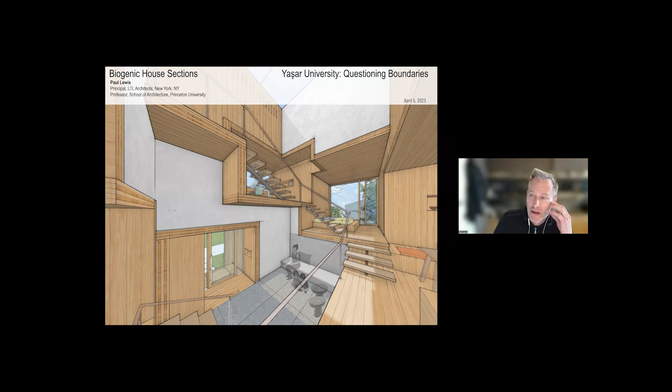Yeah, so I think that the notion of questioning boundaries is really something that we've been doing internally in the office. We've been practicing for about 25 years now. Over the last couple of years, we've had to radically rethink what we're doing and why we're doing it. And this is, I think, something that many architects are starting to face.

And in part, what we're recognizing is that a lot of the work we've done before, which we thought was motivated for all the right reasons, may have actually been heading in directions that were not entirely as effective as they could be. We've always been interested in adaptive reuse, working with existing buildings, whether it's an art museum in Texas or a former maintenance building in California that gets converted into an open collective office space, reusing as much as possible the materials that are there, or even in interior renovation projects, a new museum in New York City, where we adapted an existing space into a large-scale exhibition space for a museum for posters.

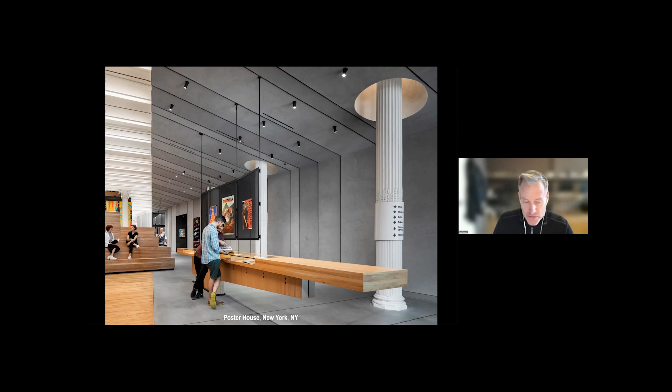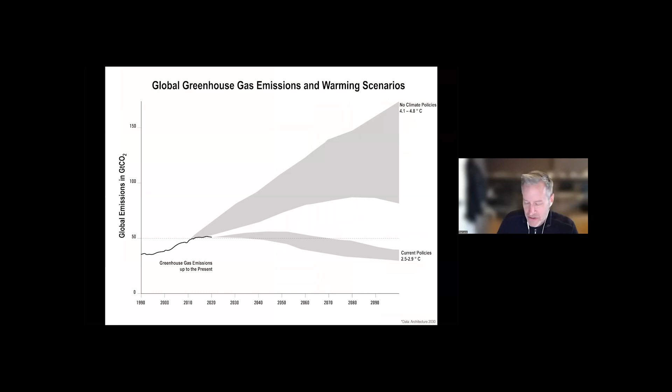But we've realized over the last couple of years that this is not exactly the whole story. So if we put this work in the context of the global picture of the climate crisis, these are all things we know, right? We're releasing way too much carbon, producing greenhouse gases, and this is having major effects on the climate. Our current policies are insufficient, and more importantly, we really need to be reducing CO2 significantly by 2030. It's only 7 years from now, to get to a point where we're net zero by 2050.

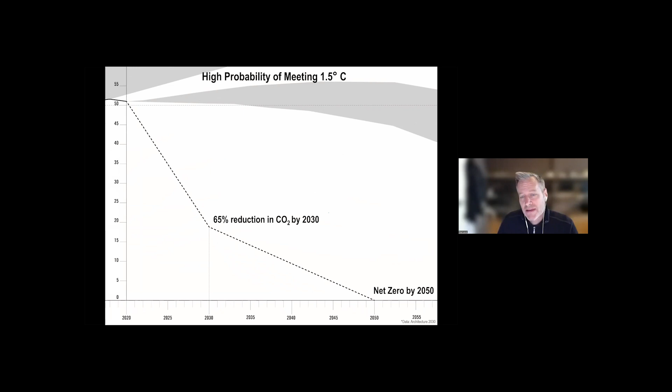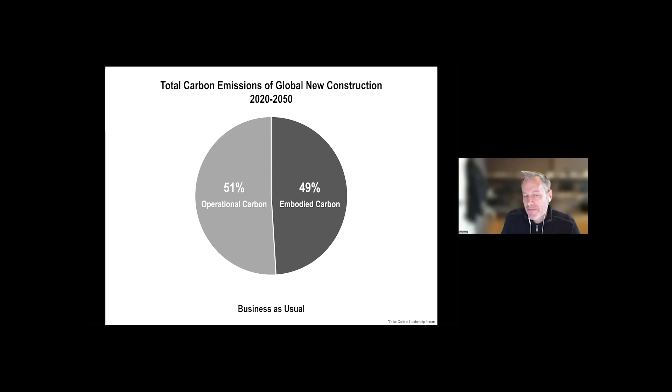The tricky thing here is that even though buildings account for a large portion of global carbon emissions, most of the energy, and I'm talking about design energy, has gone towards operational questions. How do we make buildings more energy efficient, et cetera? But that's led to an interesting condition where now, based on how we currently build buildings, about half of the carbon footprint of a building between now and 2050 will be operational carbon, and the other half is really in the upfront carbon, the energy used to make the building in the first place.

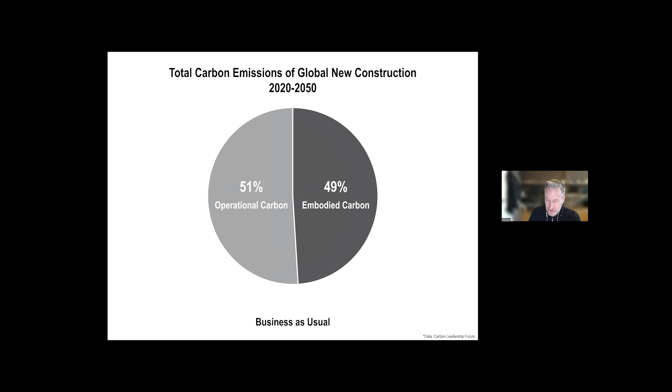And this is something that's been understudied. Again, most of the focus has gone towards energy efficiency, the performance of the building, but we've not been taking seriously the nature of the materials that go into the building at the beginning. And the problem is that that quantity of carbon is even greater the better performing our buildings get, in part because often high performing buildings require a lot of metal and steel and solar shades and various devices. So in a weird way, in getting more efficient for their operations, they've gotten less effective for their embodied carbon.

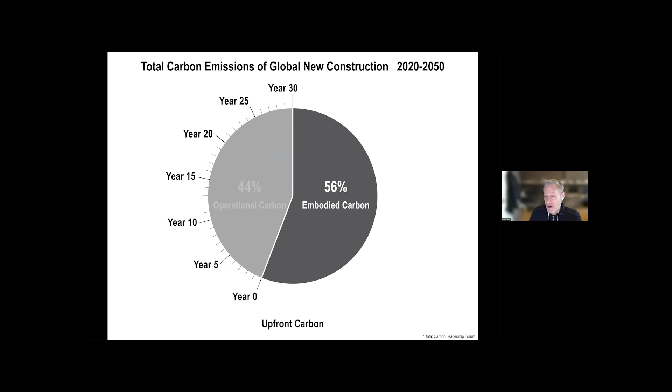And then that carbon is, as we know, spent up front, right? So you basically release that amount of carbon at the beginning of the building. And right now is when we need to be starting to make these savings, whereas the operational carbon will take years to build up to that level of equivalence. So we need to be transforming how we build, what we build from and with, and as a result, use those new materials as a way to rethink what we're going to do.

And in part, one could argue that we can just work with reuse. We should look at buildings and cities as material banks. We should just work with what we've got. And the problem with that, even though that's something that we've been highly invested in, is it's not going to attend to the fact that there's going to be this global demand for building that's going to continue, right? Something like an anticipated projection of 25 trillion square feet of new buildings, largely in the global south, for new construction.

So we can't just reuse our way forward in the future. And it raises very fundamental questions about the legacy of modernism that, frankly, most of the building industry around the world is still invested in: the use of concrete, steel, and glass.

These are carbon-intensive materials. They tend to be based on linear extraction, where you make the building and then you trash it at the end of its relatively short life. It assumes global supply chains where we're going to ship materials all around the world, and we don't tend to take into consideration the environmental degradation to where these materials are extracted, as well as the toxicity associated with these materials when they actually get embedded in our buildings.

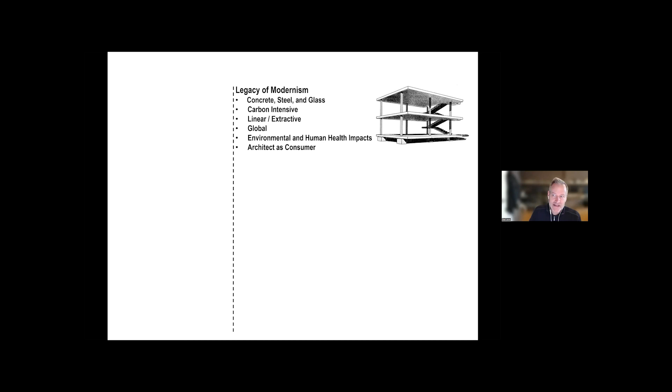And also from a standpoint of conceptual premise, it tends to put the architect as a kind of consumer, a selector of products, as opposed to really engaging the full life cycle of a material. So we would argue that this is a radical possible change to the very nature of the discipline.

Thinking through biogenic and geogenic materials, not only are they lower carbon or carbon sequestering, but they produce a different relationship between the materials and design and the kind of life cycles that need to be part of the agency or what the architect gets engaged in. In part, we know that this is because materials don't have an equal relationship to carbon.

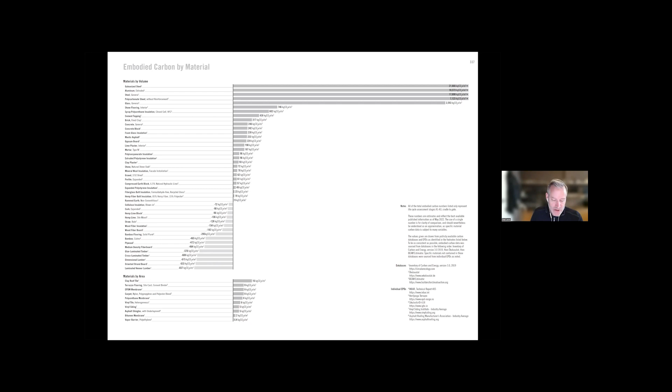Glass, steel, metals, and concrete have extremely high quantities of carbon associated with their mass, whereas other materials, plant-based materials, have the capacity to sequester and store carbon in the very building itself. So how do we move to the bottom end of the spectrum, the sequestering materials rather than the emitting materials?

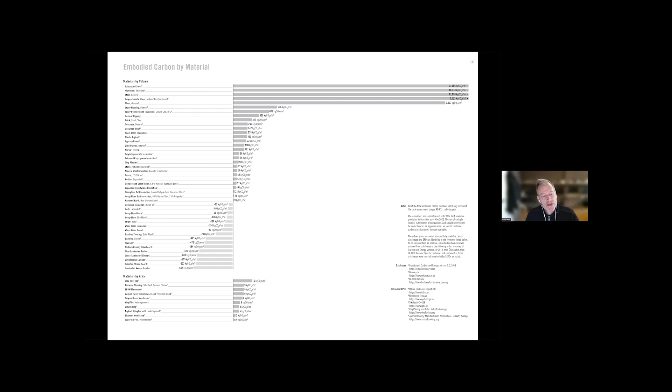So this was the basis of this book that Matthew was talking about, Manual Biogenic House Sections, which was just released a couple of months ago. And what we wanted to do with this is try to gather the best examples of buildings from around the world that have used plant-based and geo-based materials as a catalyst for their design.

Which is to say these are really inventive, creative design projects that use these materials, not just local traditions or indigenous traditions, but really looking at how design can actually be a catalyst for the seduction and the performance that can come with these materials. What was crucial for us is to make sure that we were showing buildings that are built, that exist as physical examples.

And in a strange way, as much as we acknowledge that houses are not the perfect model for building in the future, we should be building multifamily housing, we should be looking at more collective ways of inhabiting the earth. The single family house is actually more of a problem than a benefit. It works as a really good example for how architects have tested out the use of these materials in built examples, and then we could actually draw these.

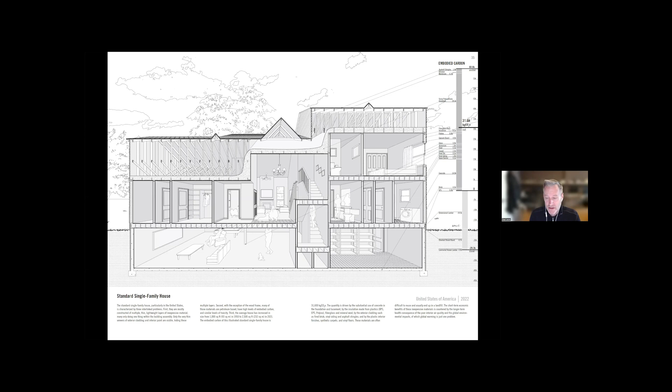So the book starts with actually a critique of the single family house. Looking particularly in the United States, this house has gotten to be extremely big since the end of World War II. The standard house in the US was about 1,000 square feet in 1950, and it's ballooned up to 2,500 square feet, in part because the materials are quite cheap.

Added to that is the fact that these materials are often made from a petrochemical basis. They tend to have toxicity associated with their entire life. But their cheapness has made them ubiquitous. They're everywhere within the building itself.

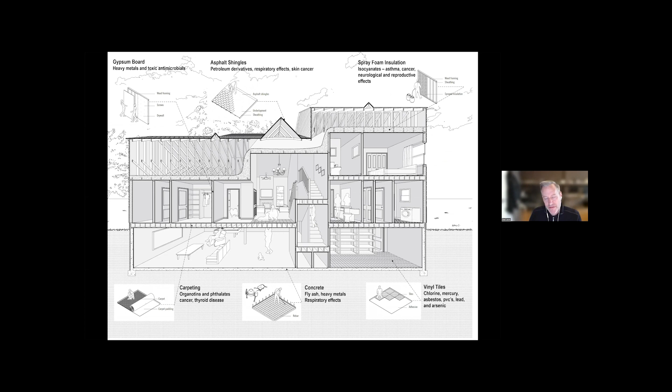So one of the things we do in the book is trace: where do these materials come from? What are their problems? How are they installed? Where do they end up at the end of their life? And almost all of them end up, not surprisingly, in the landfill.

The other thing that we looked at and critique is the assumption that buildings are largely built out of multiple materials, right? So if we look at the standard wall section of a conventional house, it's actually an assembly of multiple materials. These lightweight, thin, what we call single performing, they only do one thing often. They're the weather barrier, or the structure, or they're the insulation, or they're the paint.

They do just one kind of purpose, often because they can be marketed for that purpose and legally justified for that purpose. These tend to be hygienic layers. There's an attempt to make everything about the building be as clean-based as possible. And not surprisingly, they produce a strict binary between the interior and exterior. You don't get gradients. You get this kind of, this is on the inside and it can be conditioned and controlled, and this is on the outside.

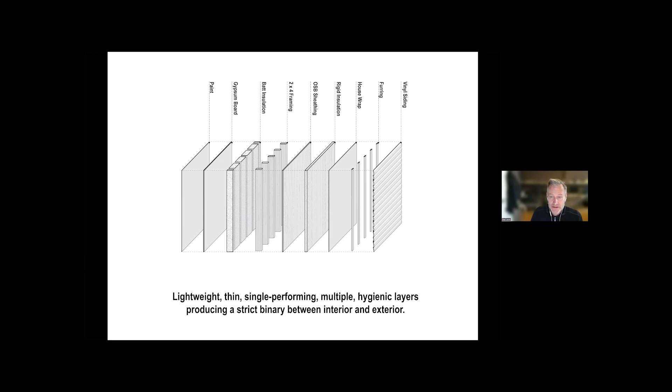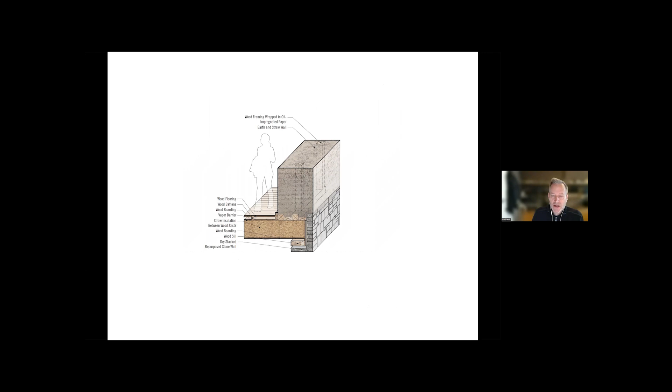And really, so much of what architects end up focusing on, unfortunately, is just that final thin veneer, the siding on the outside or the paint on the inside. And the space in between, particularly the insulation, is often left under considered. So we wanted to shift that focus in the book by looking at buildings that were thick, that were mono materials, that did multiple things, that in some cases looked at how one material could be used to produce every performance characteristic within the project, from structure to insulation to weatherproofing to waterproofing to siding to interior finish to even acoustic and in some cases olfactory benefits.

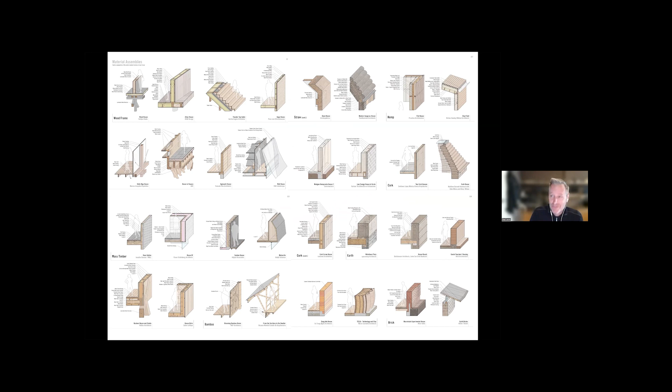And so we felt it was important to actually use our skills as architects to draw these, to make these legible. So the 55 houses in the book were all presented in 9 different chapters based on the dominant material they use, plus a chapter on reuse, which we still think is super important. And each chapter introduces the material, introduces the range of carbon associated with that material based on published carbon databases that we footnote. We then map through the translation between the field and the form.

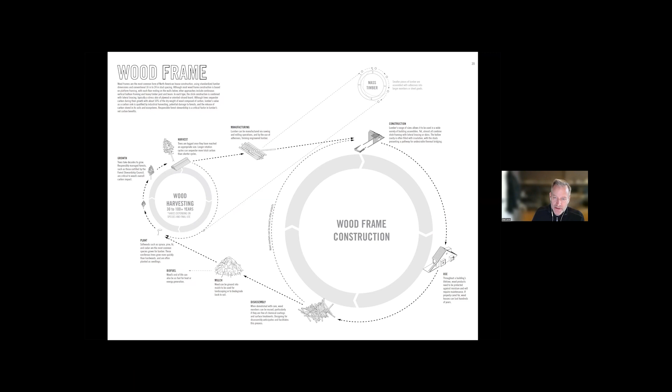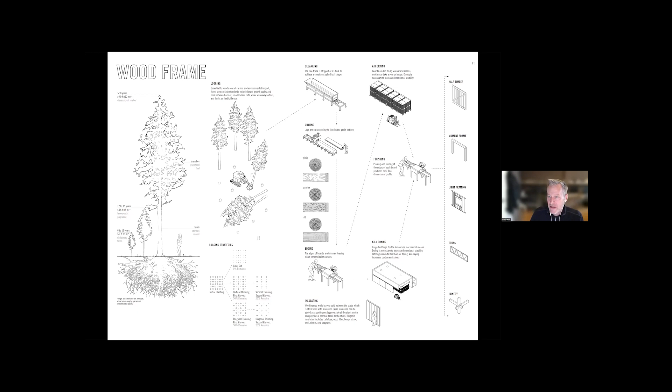So how do you go from a plant or an earth-based material to construction? What happens at the end of the life? How could we start to produce more kind of circular economies within this system? And then also looked at simply what are the logistics about the translation of plant to product? Like, what are the ways in which commonly these materials are formed, and what are the steps along the process? Arguing that the goal here is not to present these as exhaustive or thorough, but really to give a sense of what the dominant models are, so that architects could start to think about what other ways we could translate these plants into building form.

Each of the houses were presented through photographs. I should say very few of these houses are well known. Unlike Manual of Section, a previous book we had published that was all about largely canonical, really well-known buildings, we wanted to make those visible. These are less known houses, and so we wanted to show them with photographs, exterior and interior, construction photographs to show how they were put together, as well as exploded axonometrics to show how the project came together.

But the most important drawing was the single cross-section perspective that would show at a fairly high level of detail the material assembly, how it was put together, what the spatial consequences, and then what the spatial or environmental context this house existed in. So in parallel to the manual, and I'll show you examples of the different materials and the houses that we drew relative to that.

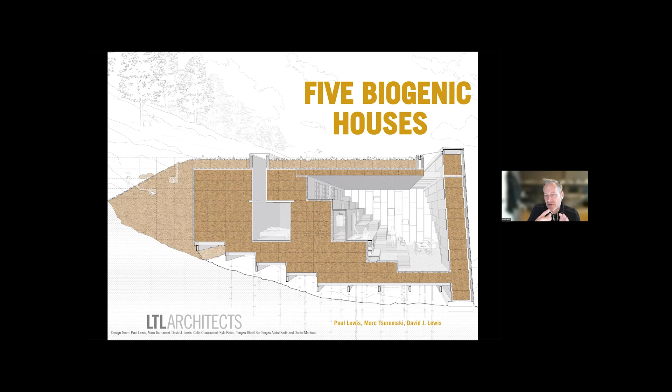Last summer, we spent a fair amount of time designing 5 houses that we wanted to look at relative to specific materials, but to really push those materials towards architectural or spatial ends that would take seriously the idiosyncrasies, the unique qualities of each of these materials. In other words, to not simply see plant-based and earth-based materials as a replacement for modern logics and material, to not just simply say, okay, I used to have plastic insulation, now I'm going to use hemp insulation. But what would happen if we actually looked at the spatial consequences that could come out of these materials? Could we end up with very different assemblies, different approaches to the very nature of the house itself?

So I'll weave these 2 things together for the rest of the talk: the manual of biogenic house sections, and then also the 5 speculative houses that we designed based on these assemblies and the overlaps between these different materials.

So mass timber is kind of the poster child for plant-based building material. It's now quite well established. And on the one hand, it's a fantastic replacement for concrete and steel, structural capacities, carbon storing, et cetera. But there are some problems with it, not the least of which is that it takes a long time for trees to grow. Harvesting trees, in a sense, takes that carbon sequestering component out of the forest. It actually releases as much carbon as it might sequester. And then we have the added problem that the lumber industry often uses only about 50% of a tree. So 50% of the harvested tree is going to go back to the atmosphere anyway. So at most, it might be a net zero gain.

So it's not the single solution that many people argue it to be. Yes, wood is fantastic. It's much better than concrete and steel, but it's not the only solution. And so we have to look beyond simply mass timber as the sole solution.

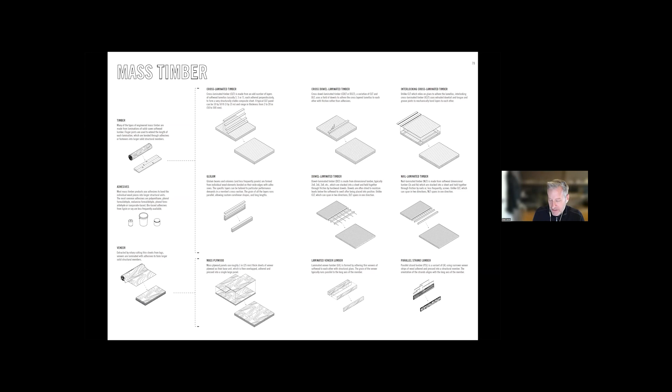The other problem with mass timber is that typically it's just a replacement for the post and beam logic of steel or the kind of slab logic of concrete, precast concrete. And in some ways, we would encourage different modes of thinking that take seriously the sheet slab quality of the CLT.

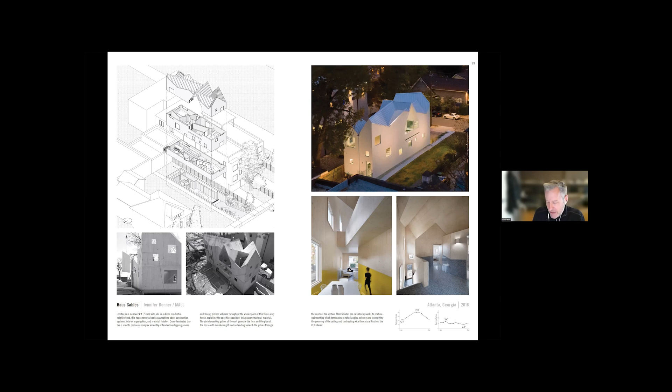Jennifer Bonner has done excellent work on this, both with her book Blank, that argues for the role of the sheet good as a source of invention, and her own work, Haus Gables, is a great example of a kind of house that uses the CLT to produce very different forms that echo the gabled form of the timber two-by construction, but produce spatial nesting that is fundamentally dependent upon the qualities and the unique characteristics of CLT.

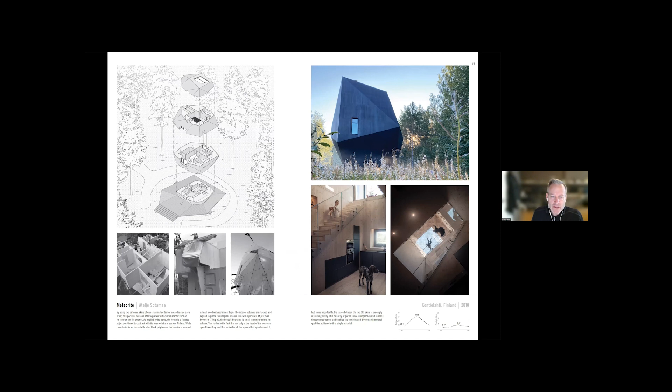Another project in Finland, which was on the cover of the book, is this kind of fascinating project that's almost exclusively built with cross-laminated timber. It's really two skins of cross-laminated timber, a rectilinear skin on the inside and a more faceted skin on the outside. And the interstitial space between them is essentially a kind of insulation space that's not packed with insulation, but is a kind of buffer zone of air.

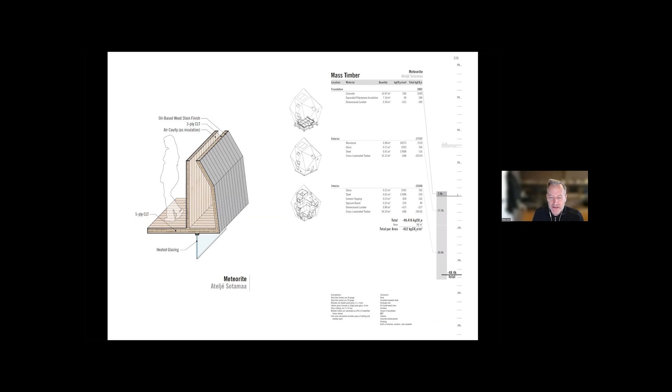It's a very different way of thinking about how we construct. It has a huge amount of carbon sequestering, in part because there's not the need to fill all these cavities with incredible amounts of plastics or rock wool or other forms of highly carbon intensive insulation. So this building itself sequesters about 48,000 kilograms of CO2.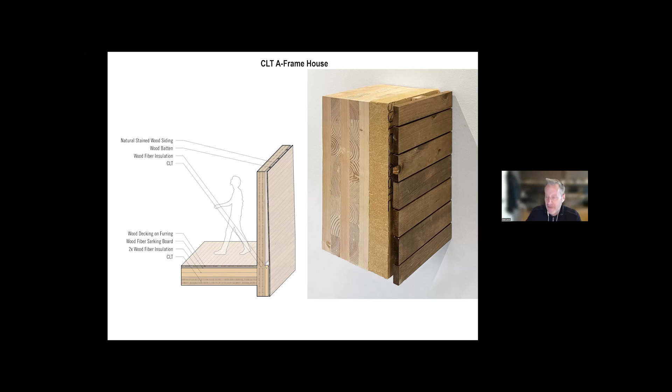So for a project that we entitled CLT A-frame, we were interested in how you could actually use the entire CLT blank, the entire 10-foot by 50-foot unit of CLT. In other words, to not have any waste associated, not have any cutoffs, not have any of the excess, but to take it on as a kind of component itself. So this house is formed by 10 panels of CLT.

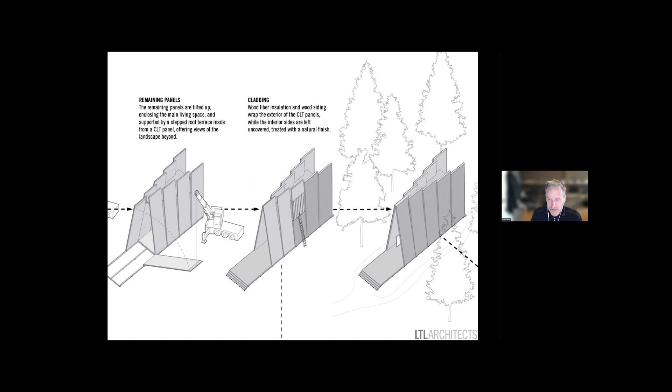The two pairs of panels at the back of the house are laterally stabilized by a series of staircases, whereas as you move towards the front of the house, those two blanks then lean into each other, forming the iconic A-frame of the weekend or the country house. At the back of that house, the stair extends up and it keeps going up onto the roof deck. And the space between these parallel panels then becomes a kind of roof terrace that then leads to a lookout in the treetops at the front of the building.

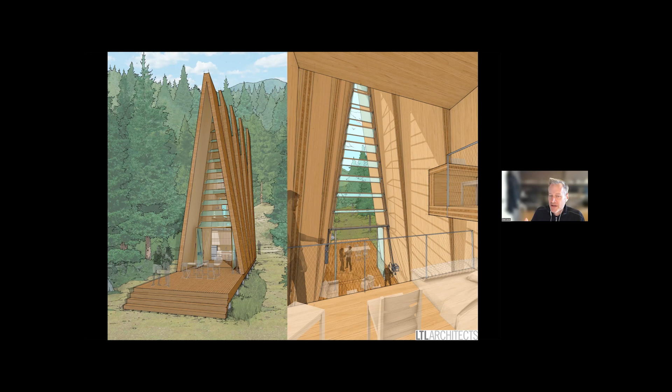And on the inside, as we know, one of the great things about CLT is it doesn't require any interior finish. You can use the wood itself as the finish. You don't have to have all the plaster. You don't have to have the latex paint. You don't have the gypsum board as an interior finish. But we particularly like the fact that you would have this now almost 50-foot high space, a very unusual section that's the logical consequence of just using the entire sheet good of CLT.

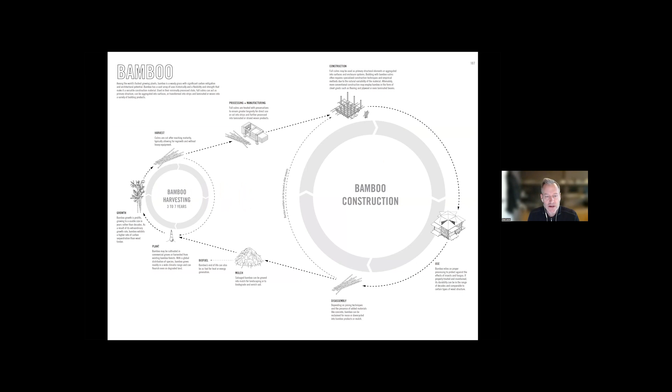So the other material that needs to be looked at for its structural capacity is bamboo. And unlike wood, bamboo grows extremely quickly. It takes about 3 to 7 years to come to full maturity. You don't clear cut a bamboo forest, you tend to take out about 1/5 of the bamboos. It's rhizomatic, so it continues to grow. You're not damaging the root system. So it's continually able to be harvested. So it doesn't involve the clear cutting that timber does.

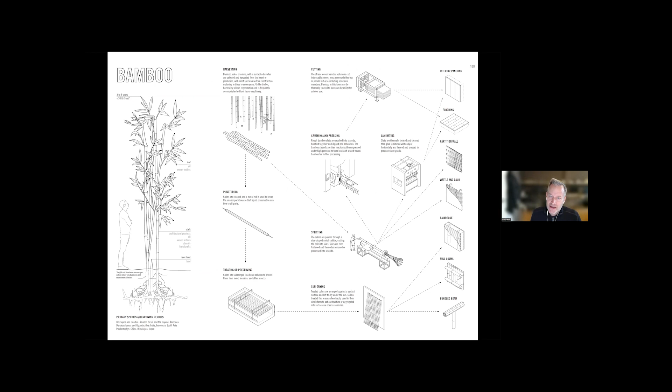More often than not, the culm is used by cutting it into a series of fragments and re-gluing it together. But one can also look at ways that you don't have to simply cut it into these different strands, but you could actually use it as a bundled culm. It produces some questions about the relationship between the irregularity of the structural component and how it can be aggregated into a system. But there are some fantastic examples of the way in which this bundling of multiple culms can produce a kind of inventive structural approach.

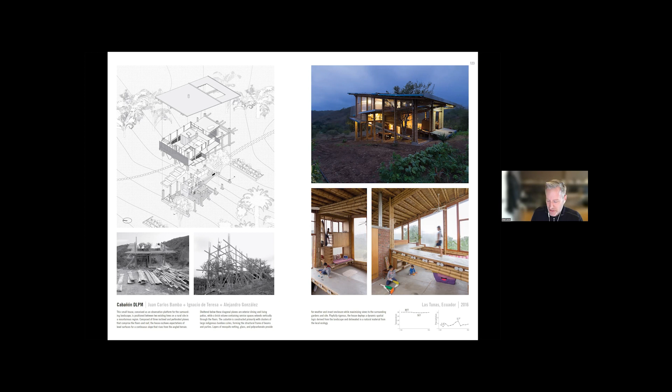Here, a house where the very lashing, or the kind of triangular bracing, diagonal bracing of the culms actually produces a very different approach to the nature of the floor plate. Here you get a continuous ramp working its way through the house that also provides lateral bracing across the whole span. So this is an incredibly strong project working with bamboo's strength-to-weight ratio and the spatial qualities that might come out of that geometry.

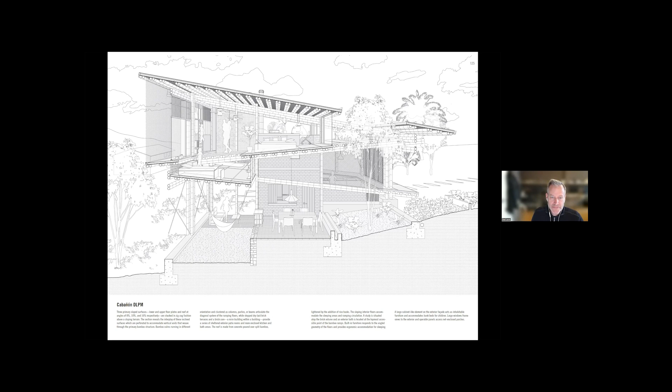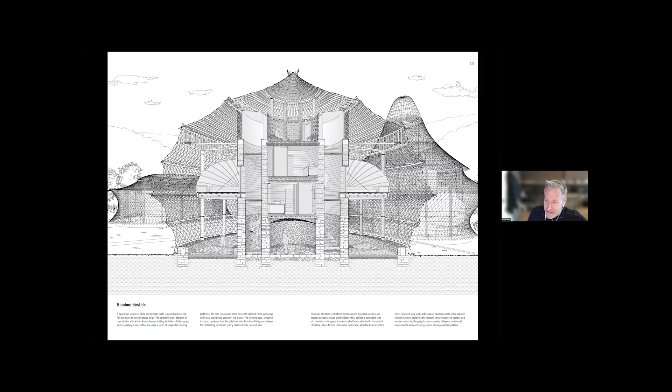Earth is a fantastic material. It's been around a long time, right? Earth has been a building material for as long as we've been on the planet. And it unfortunately hasn't got as much attention as it deserves. It really has great capacity to operate as a thermal envelope, as a protective barrier, and to be extracted or basically harvested, if you will, from very local sources.

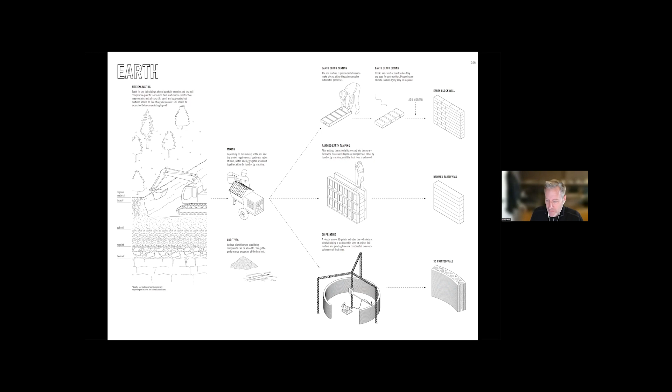Because it's really a translation between a liquid material that then solidifies, it can be formed into earth blocks or tamped into rammed earth walls. Again, the hope is to not use as much Portland cement, but work with a clay mixture to stabilize the wall itself. And there are recent experiments looking at 3D printing with earth itself, not with concrete. Most 3D printed houses one sees are based on printing concrete, but there are ways to think about 3D printing earth that I think are incredibly exciting.

So in the Wohnhaus Flury house, here you're looking at about 30-inch thick walls. These are cob walls, a combination of earth and straw that are basically stacked up and then sheared simply with a spade or a shovel to produce this really beautiful contrast. These earthen walls absorb humidity, have fantastic acoustical qualities, are great in their ability to work as massive walls, and they have an interesting contrast with the wood floors and ceilings.

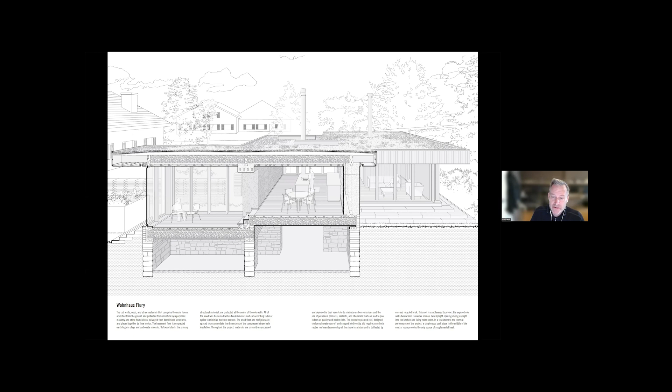These wood floors and ceilings are themselves infilled with straw and insulation, and they overhang the earthen walls substantially in order to mitigate some of the erosion that would occur through wind-driven rain on the exterior. But these earth walls are not just the interior finish, but also the exterior finish of the building, and in the process able to sequester a fair amount of carbon.

It should be noted that in this particular building, the cob walls are packed around a wood framed wall that is really carrying the load. So often it's a hybridization between these different materials to produce inventive solutions. I wouldn't argue that a single material has to do everything, although there are examples I'll show where that is the case.

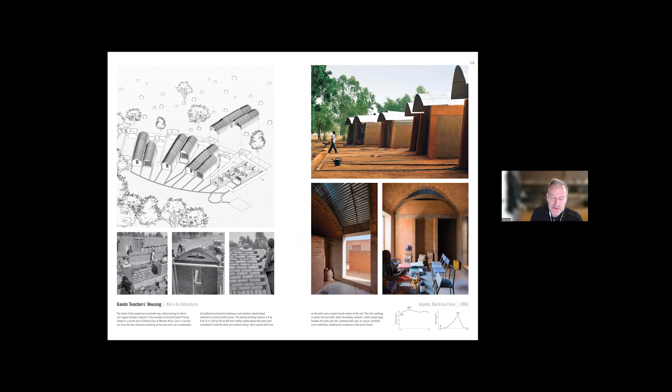So an earth block project in Burkina Faso by Kéré Architecture looked at locally making many thousands of bricks that were used to produce the walls, but also formed into low arches. They were then protected with a thin veneer of corrugated metal that helped protect against erosion, but also helped harvest the water so that it could be used as gray water for the project.

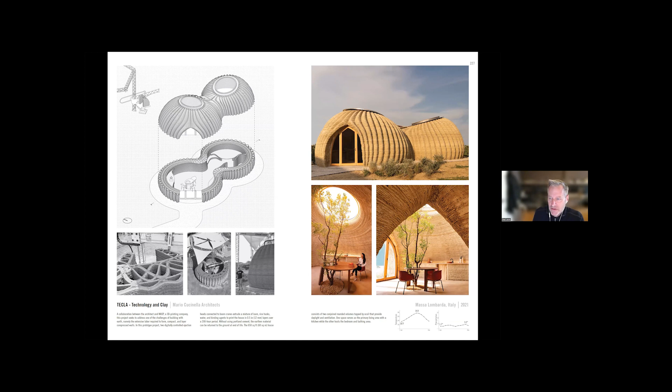And a 3D printed earth project from outside of Bologna by the 3D printing company WASP in conjunction with Mario Cucinella Architects is really a fantastic experiment in 3D printing earth. Again, not concrete, not Portland cement. This is pure earth, printed in a series of bands that allow cavity spaces within these relatively thick walls, about 30-inch thick, then infilled with rice husks for insulation. So it's an inventive process where geometry, material, insulation, and performance all line up together in this single project.

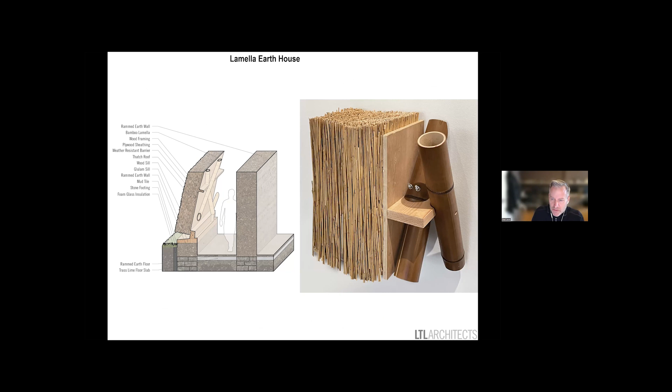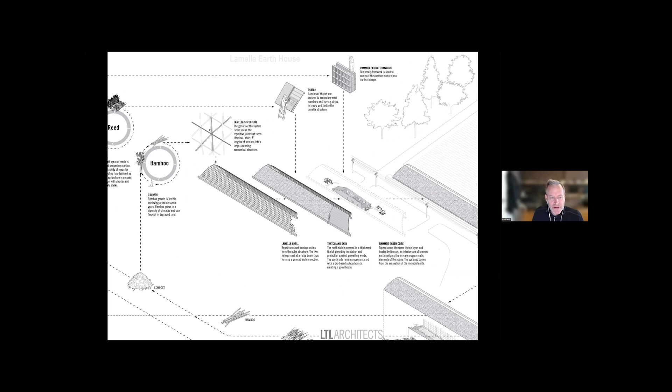So for a type of agrarian or farmhouse, we wanted to combine earth-based construction with the efficiency of bamboo to produce a lamella, or arched bamboo, larger scale structure in which we would then position an earthen dwelling. The lamella structure is based on using the exact same relatively short, 8-foot length of bamboo, that, using a repetitive joint, is able to produce an entire diagrid or lamella that forms the entire large scale single span column-free space.

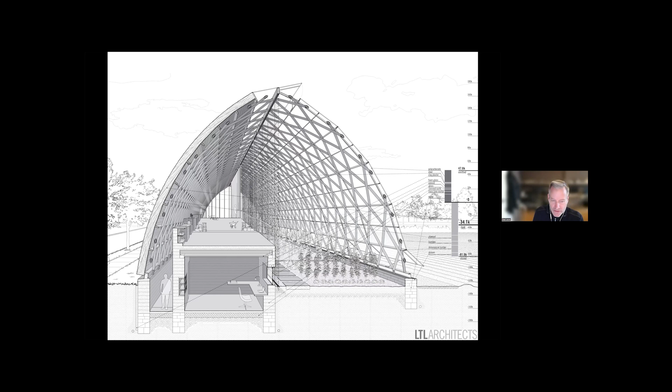The north side of it is clad in thatch insulation, whereas the south is built with translucent polycarbonate, plant-based polycarbonate, to, in a sense, produce a quasi-interior, a type of a greenhouse, in which then there would be located the earthen structure embedded partially in the ground. So this introduces gradients of temperature as part of the project.

So it's not a binary between outside and inside, but it assumes that you have this kind of using the building as a kind of an insulation layer and then inhabiting that insulation layer, using that as a greenhouse, using that as a kind of space for different ways of producing climatic qualities within the project. And ultimately producing a different model of an agrarian structure that doesn't just default back to a pre-engineered steel or plastic structure within our landscapes.

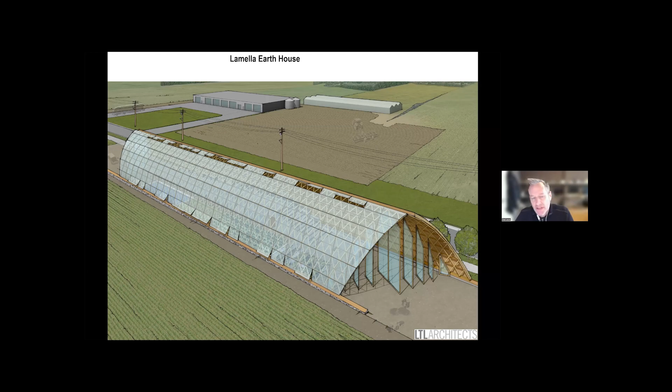So the last three materials I'll present are all based on thinking about insulation as a point of departure for their use. Architects are not really good about caring about insulation, to be honest with you. We tend to want to have enough insulation to fulfill a performance criteria, and as long as it's inexpensive, that tends to be the driving criteria: performance and cheapness, right?

The downside is that it's led to now most insulation being produced by plastics, and we can think about EPS, XPS, blown insulations, et cetera, or even mineral rock wool, mineral wool, which is basically a kind of very peculiar way of essentially aerating rock through a huge amount of energy and heat to produce this material.

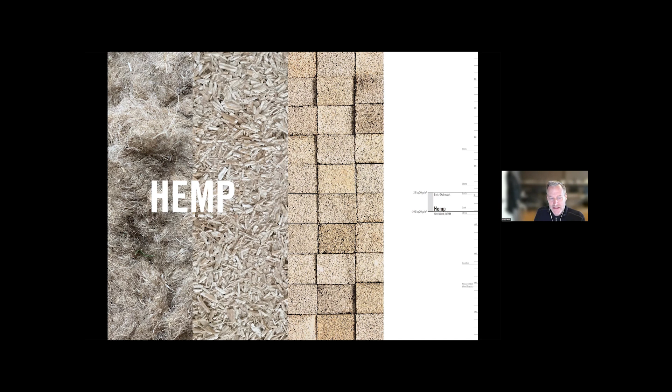Hemp, on the other hand, is plant-based. It's from the hemp plant that grows incredibly quickly. It takes about 3 months to come to full maturity. And the hemp plant is a very resilient plant. It tends to require very few pesticides, can work with relatively limited quantities of water. In other words, it doesn't require a huge amount of irrigation. And more importantly, the plant itself can be used in multiple ways.

Hemp, at least in the United States, was basically banned kind of unintentionally because of the war on drugs. Industrial hemp is very different than the plant that's used to produce the psychoactive drug that we know in marijuana. But by banning marijuana in agricultural fields, in a sense, the entire hemp industry got killed, at least in the US, and has only been legally possible since 2018 to actually grow in the States. So this is a kind of new emerging material, in part because growing the plant has only been legal for about 5 years.

So there's an interesting process of decortication, the separation of the plant. It has many components, but really we're talking about a separation between the fibrous exterior of the plant, which can be used to make textiles, paper, et cetera, versus the interior hurd, which is really what gets used to produce the insulation in buildings. It has a whole series of air pockets, which is why it's able to work as an insulation material.

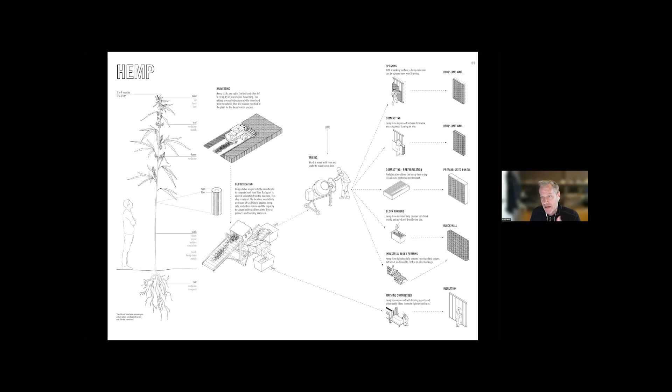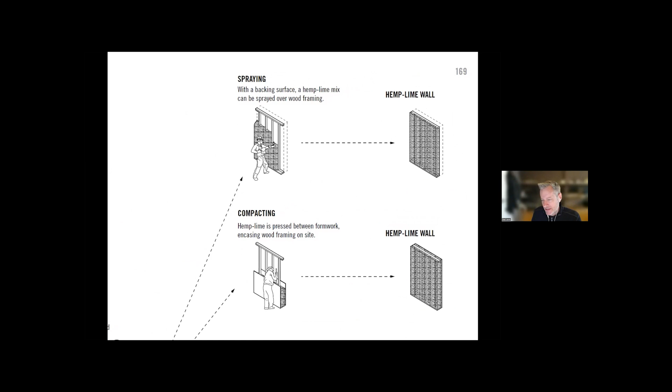But hemp is often combined with lime to produce what is known as hemp lime. It's unfortunately often referred to in English as hempcrete, which suggests it's a replacement for concrete, which it's not, right? It's an insulation material. It's not a load-bearing material. It can be sprayed into the wall, and the lime combined with the hemp produces a fire-resistant, rot-resistant, insect-resistant material. It can also be formed into prefabricated panels.

One of the downsides to hemp and lime is it takes a fair amount of time for it to dry. So prefabrication deals with that drying delay that might be difficult on site. And there are also companies looking at ways to build it into prefabricated blocks so it can be stacked up within the project.

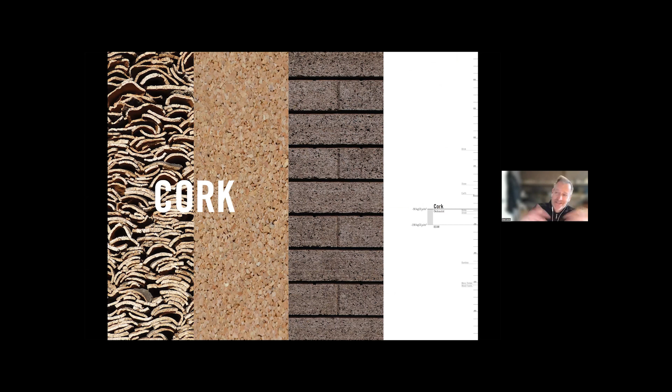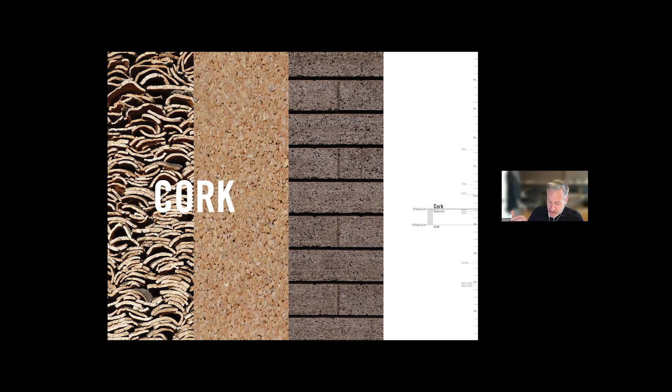Cork is another insulation material that actually does even more things. In some ways, it's even more robust than hemp. It can be structural, it can be acoustic, it can actually be rot resistant, it can be moisture resistant, et cetera. The downside to cork is really a question of scale.

It takes a fair amount of time to grow the cork on cork oak trees, which can only be harvested every so often. More importantly, there's only a limited region in the world, the Iberian Peninsula, where most cork is grown. And so it's very difficult to scale cork at the level that it would need to become a kind of key building product. Most cork used in construction nowadays is a product of the waste of making wine bottle stoppers.

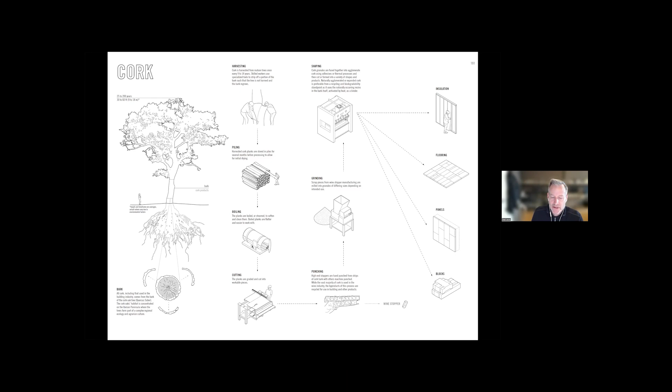And most of the cork we currently use is used to make veneer, so flooring. But one particular example, a kind of fantastic house, was made almost entirely out of cork. This involved milling about 1,200 custom cork blocks. Cork is able to be milled very well, so that here the cork is able to do all of those

things I described before. Almost the entirety of the house, with the exception of a series of lateral ring beams, was made out of cork and corbelling cork into the roofs. Amazing house, and again, the only downside to cork is that it's harder to scale it as a material.

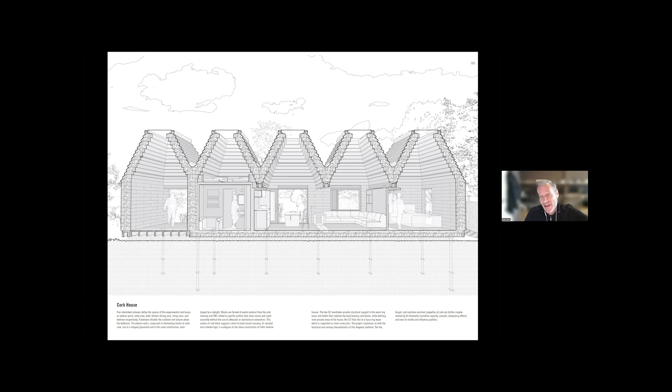In contrast, straw is everywhere. It is everywhere in the world. Wherever cereal grains are grown, straw is the agricultural waste product of that growth. So wheat, barley, rice, etc., all produces straw, and an incredible amount of biomass around the world is actually produced every year now in the form of straw, but it then gets returned back to the atmosphere by burning, decomposing, et cetera. So this is a fantastic resource.

It's available, it's cheap, it's already there. It doesn't have to replace any other agricultural fields. We need to figure out ways to use straw, in part because it actually is much more resistant to animals and to insects than one would think. If it's sufficiently compressed, it can be fire resistant and it can be load bearing. And of course it has insulation capacity because of the nature of the straw, the straw geometry. It grows really fast and is ubiquitous.

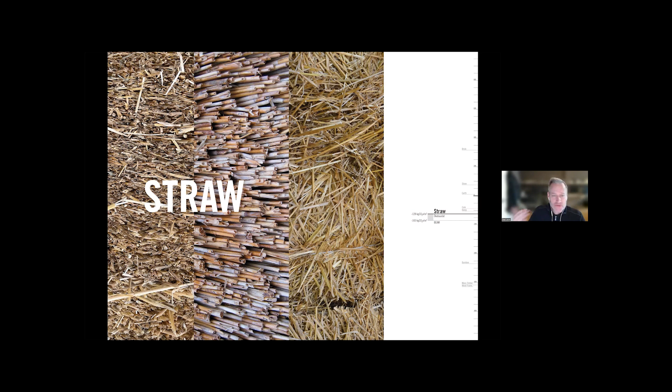And it's currently able to be used in a variety of different standpoints, but I think that there's an entire future of how straw could be used that goes beyond the current models. Those current models are often dependent upon either harvesting it as thatch, and that's kind of a slightly different type of reed than the cereal-based straw that we see being formed into the bales.

And one of the interesting things now is because of the harvesting of straw to make it able to be removed from the fields and used and distributed back to animals as bedding for animal agriculture, it's formed into these 2-string or 3-string or round bales. This is purely a product of the way in which it gets harvested, not necessarily the best way to use it for building. Nonetheless, it still gets used this way.

And there are examples that go back to Nebraska, the Great Plains of the United States, where there are limited trees, where buildings were built from stacked straw bales, clad in plaster to provide rain protection and protection against insects. And also the structural skin, the skins out of plaster can become structural, deal with lateral loads, particularly when combined with some level of mesh.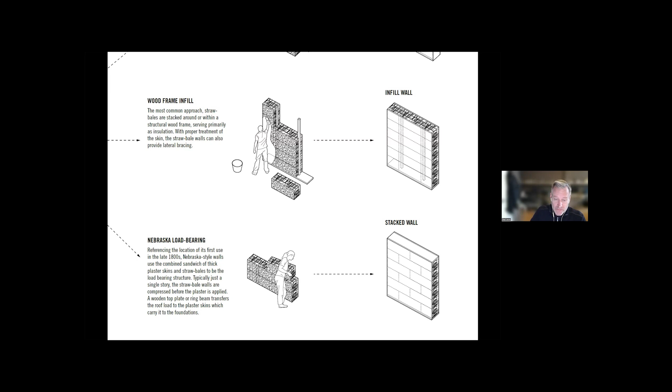It's embraced by the California building codes. California has a fair amount of seismic constraints. So straw bale is acceptable within those seismic regions. Often it gets infilled into wood frames or can be prefabricated into assemblies. And what's nice about this is you can actually compress it even more. And the more you compress straw, the more it's resistant to the spread of fire. It basically chars, it doesn't burn.

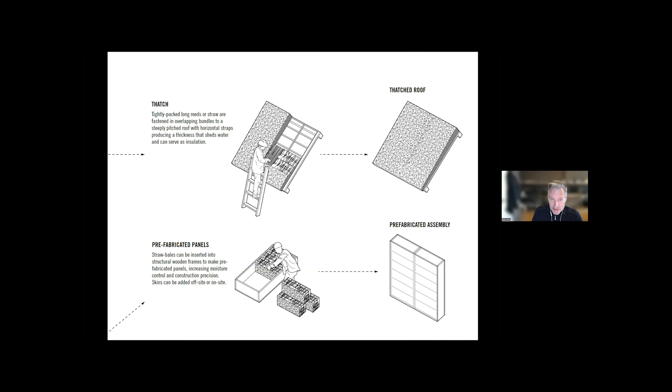And certainly if you compare it to any other plastic-based insulation that burns incredibly quickly with toxic association, straw is so much better as an insulation material than any of the plastics on the market. There are some great examples of load-bearing straw being used to produce an entire building. So Atelier Schmidt's experimental pavilion, the Gartist House, stacks up jumbo straw bales. These are quite big. These are 650 pounds. They had to be moved by a crane, but because they're so dense, they could carry the load.

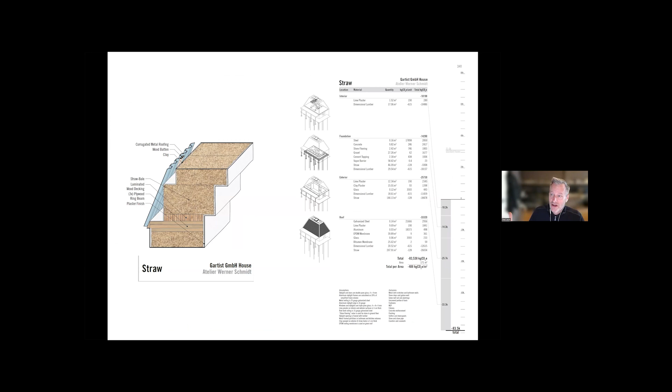The only additional structure in this building is a lateral ring beam of CLT that stiffens it from side to side. Otherwise, it's a corbelled structure that basically encapsulates the entire building in a thick blanket of agricultural waste that also works as a high-performing insulation and humidity mitigating skin. And this building then sequesters 84,000 kilograms of CO2 equivalent. It's a pretty amazing project for a small project. So this idea that we can use straw, use its cheapness en masse, is something we're super excited by.

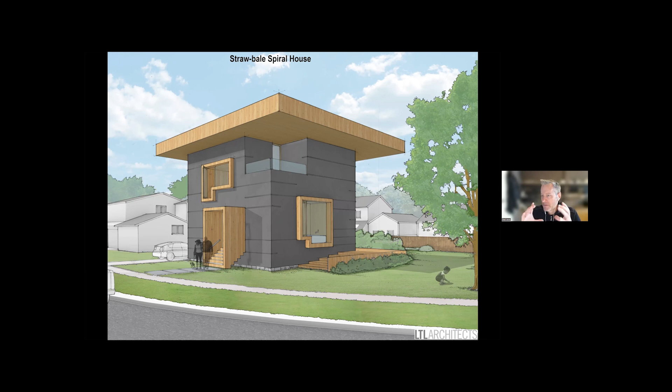So we designed two projects, and I'll end with these two. Two projects that said, okay, there's a different way to think about thickness, about poche, about the nature of a building where we don't assume that the appropriate approach is to make this super thin, multiple material plastic wall. What happens if we could imagine a much thicker wall, a more interesting way to approach the space of the house? So for this project, we combined both the efficiency of CLT volumes or modules with the thickness of straw bale.

So in a sense, we almost assumed the entire building was solid straw, and we carved away space by then infilling those spaces with prefabricated four-sided CLT modules. In a sense, using the CLT to displace the straw and replacing that void with an inhabitable room that would be prefabricated through CLT.

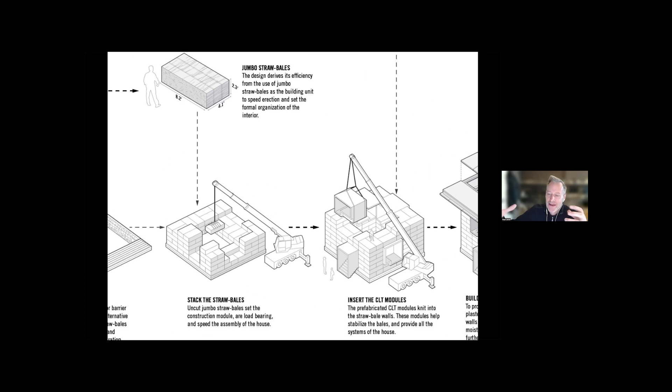And CLT are tied together to form a kind of diagonal structure. So that stabilizes the straw, and then the straw helps stabilize the CLT. So in other words, these two things work in conjunction with each other. There's a large CLT overhang roof that provides mitigation against the rain-driven erosion, and also provides shading around the house.

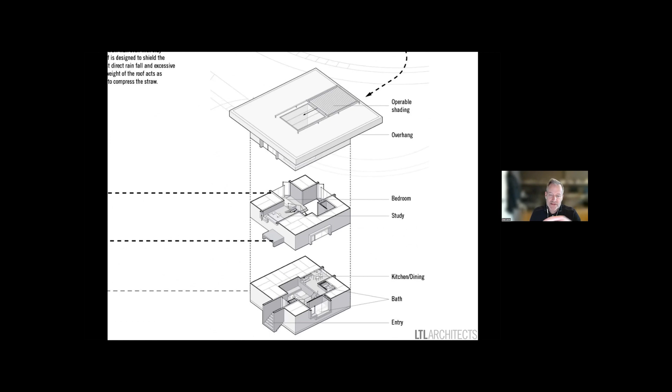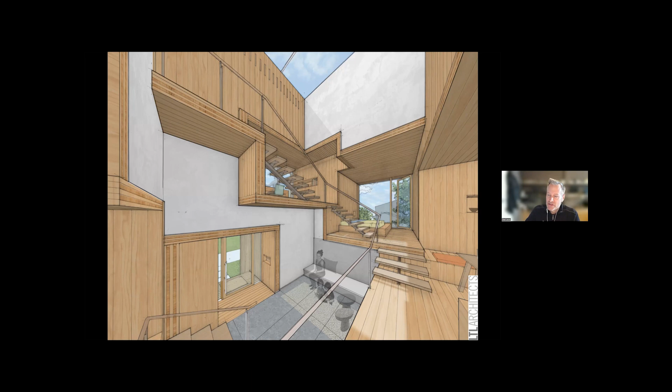So what you end up with is a series of rooms, almost like a kind of Adolf Loos spiral or Raumplan of rooms working their way around the central atrium. That really allows every room to have full floor-to-ceiling glass, and at the same time, the building is thick and fully insulated. So we're trying to maximize both. Lots of openness and air and access to light, but also thickness and porosity and density. So hopefully getting at a very different understanding of the nature of the architecture because of the unique qualities of straw.

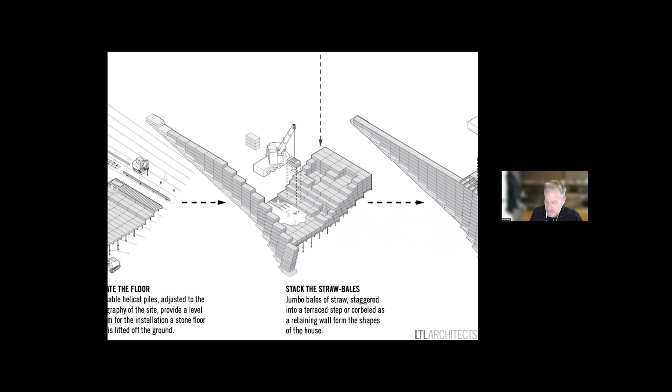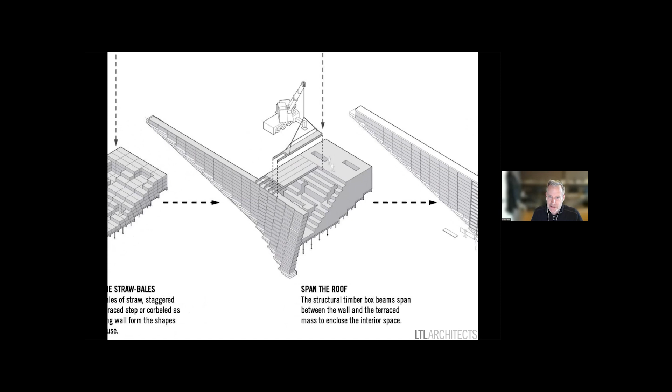They're then connected or tied together through a series of wood joists that are then infilled with, again, straw insulation. And then there's often a criticism that animals are just gonna eat the building. And it's a nice anecdote. We know the story about the three little pigs. So straw comes with bad PR. We understand that. But we also want to kind of embrace that.

What happens if we actually did put a layer of straw on the top of the building, on top of the waterproofing layer, that would be left to return back to the ground? And could we actually make this so that animals would want to come to the top of the building? You could embrace the fact that animals might eat part of the house, and that's okay. So to find, again, different ways that the building can be part of the landscape.

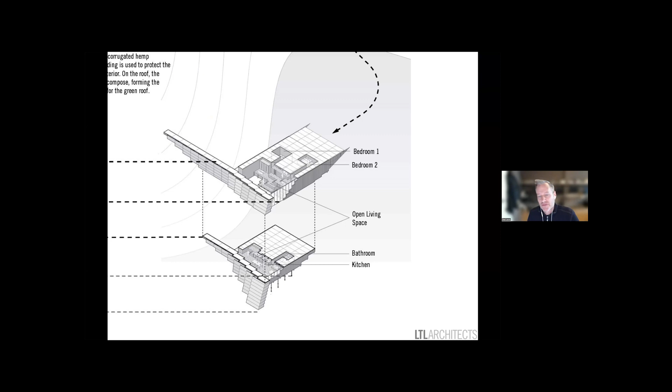On the inside, we wanted to both stack up the straw to produce a different landscape for the collective domestic space, the living room, the kitchen, the dining area, but then also to sequester the private spaces into the thickness of the straw within the project itself. So here you get the collective gathering space for the family or whoever's living here. This is a very small house in some respects. I think it's only about 800 square feet.

And then the bedrooms are small. They're embedded into the cocoon of straw on the back. They have skylights, so they bring in light in a different way. And you end up with a house that actually has more mass, more solid straw than it does occupiable space. And we really like that idea. Modernism avoided thickness, trying to make buildings as thin as possible. What happens when we go the other direction? Could we actually embrace thickness and poché and the carbon storing capacity of that as beneficial to the architectural logic?

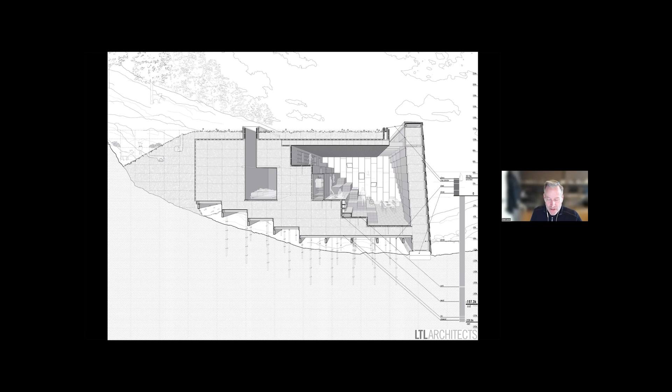So I'll end there, but we're very excited by this as a radical transformation of the very premise of what we do as architects, of the very nature of design. We think this is probably the most significant catalyst for transforming the basis of what our architecture is built from since modernism. But I would argue that we're at the very early stages. This has to accelerate, it has to scale quickly, and it requires inventive approaches to how one would work with these materials in other ways.

So what I'm presenting is not the end, it's not the conclusion, it's the catalyst, it's the start, and the challenge to you all is to think about how you might work with these materials in ways that creatively envision a better future.